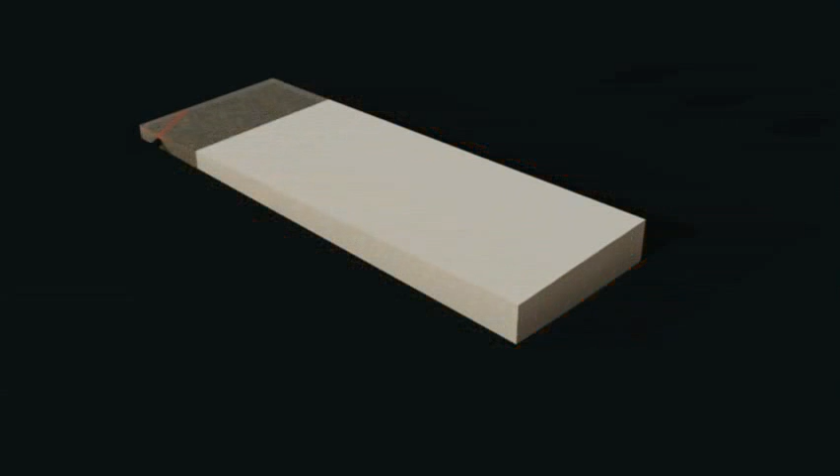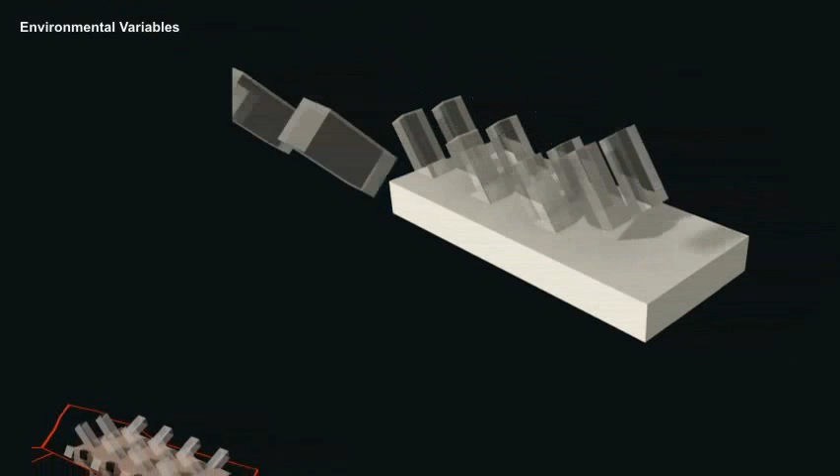The project starts from the base of a prismatic volume of relationship 2:1 as an abstract element that represents the concept of building, that which must be constructed with the material in existence, the shale rock. In other words, it is not about transferring and creating artificial material, but rather of transforming the existing one.

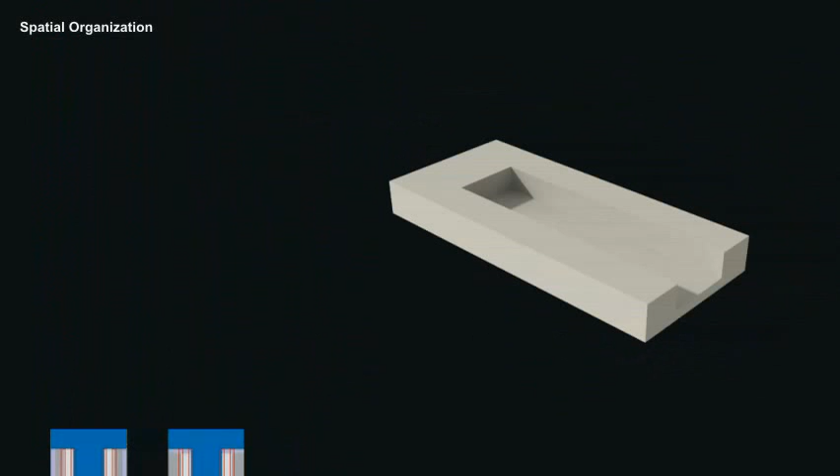Hence, with these conditions, the building will be partially buried. The consequence is, it will improve the integration parameters of building territory, building environment, and building landscape, while also taking better advantage of the environmental variables.

But perhaps the most remarkable thing is that the building develops inversely to the manner normally established. Here the idea is not to fill in empty space in order to construct, but in fact exactly the opposite, to generate holes in the filled space to create a building.

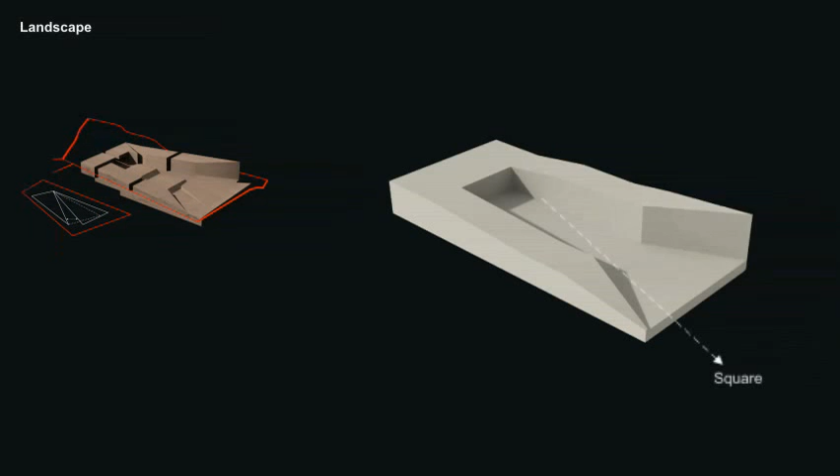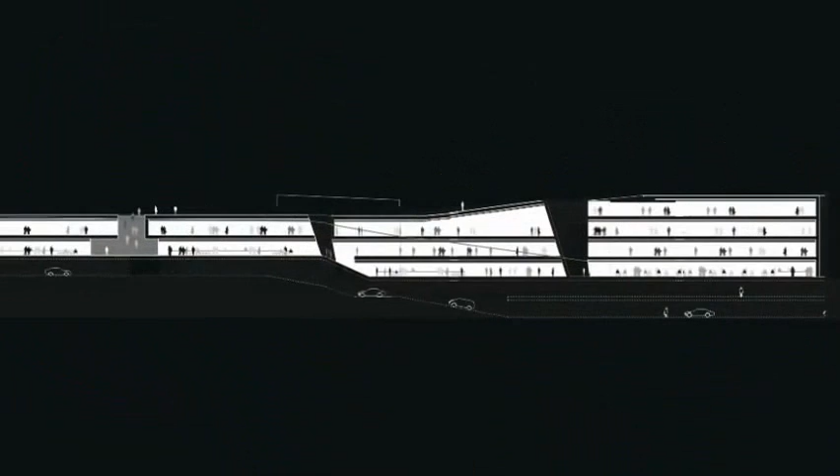The ground is eroded to form a building leaning toward the light of the sun, protecting the open public spaces from the predominant wind, accepting the slope of the land as a form of modulation of the circulatory pattern, using contact with the ground as a form of absorbing energy, concentrating public services in strategic places, and the private ones as protective sections in the cold northern faces.

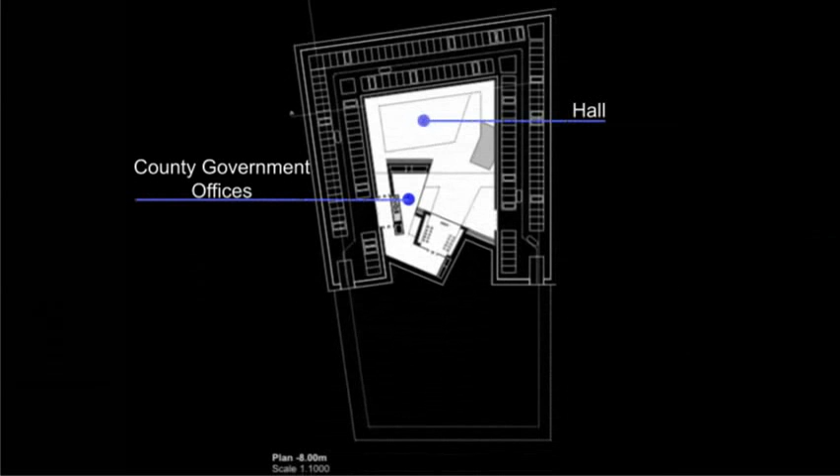The site plan complies then with two important properties. The first minimizes the occupation factor to such a point that it can be understood as zero. Thus, although the entrance, the internal square, and the roof are human interventions, they're also part of a treatment that associates, encompasses, and integrates landscape, territory, topography, and building.

Secondly, the building is not developed in height, but rather it follows the logic of the landscape and the topographic plot. The building emerges as part of the territory. It is part of it.

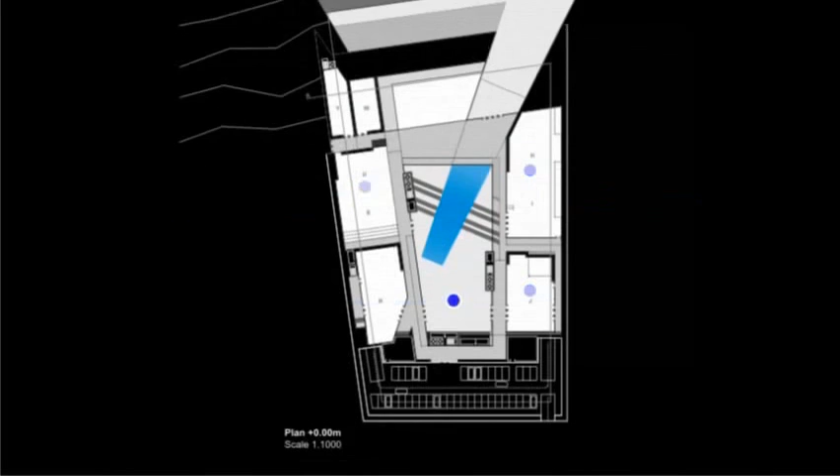It doesn't make sense to have an environmentally integrated building if we damage the environment to build it. The initial approach must take into account the construction process in conjunction with the environment in a responsible, sensible, and integrated way. And here, the concept of economy of resources, essential minimum development, and economy of intervention begin to take form, giving a new sense and impetus to the previously mentioned concept of less is more.

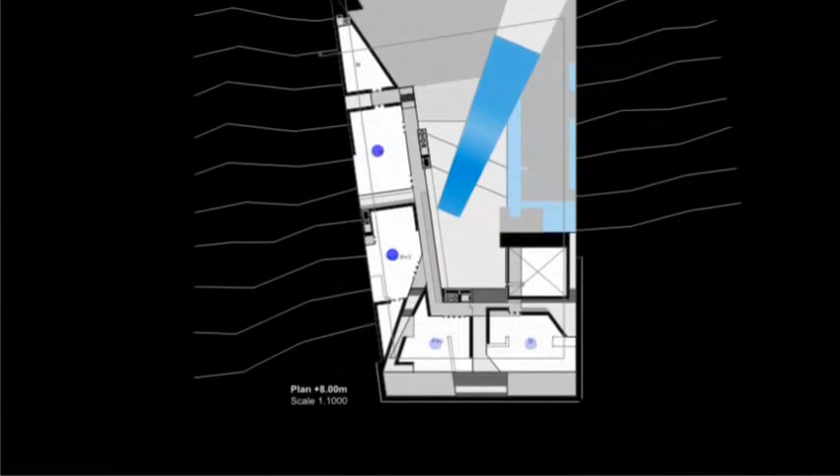This construction process will have to be seen as a modification of the biosphere, that is to say, as the modification of a living system that includes the chemical and biological processes necessary to sustain life on the planet and to adapt it to human needs.